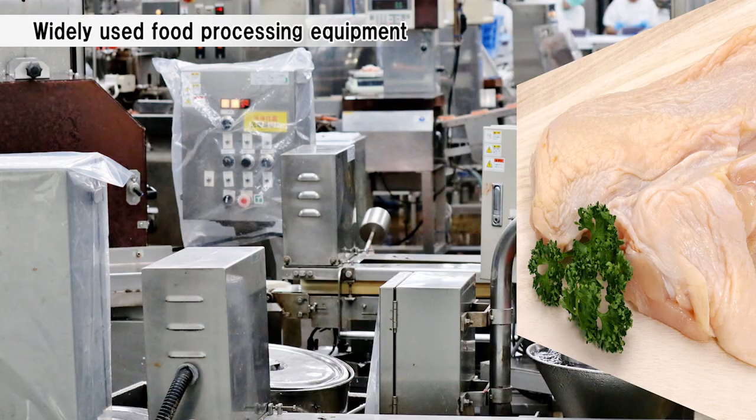At first, let us explain about the food processing equipment market. Food processing equipment is widely used in food processing plants, school lunch centers, and catering companies. Various processing equipment is needed to slice, bake, and fry many ingredients like noodles, bread, meat, and vegetables.

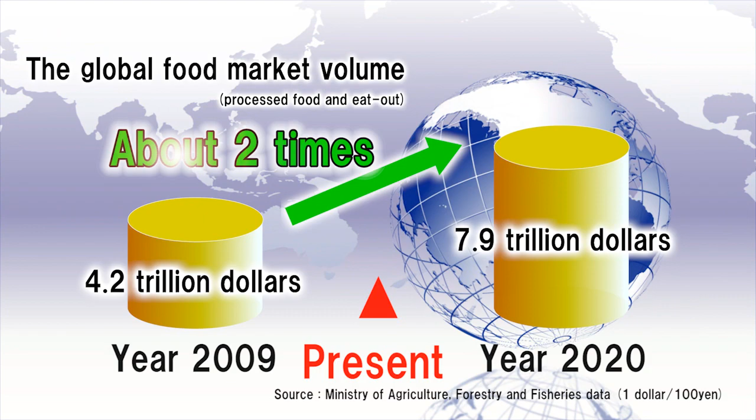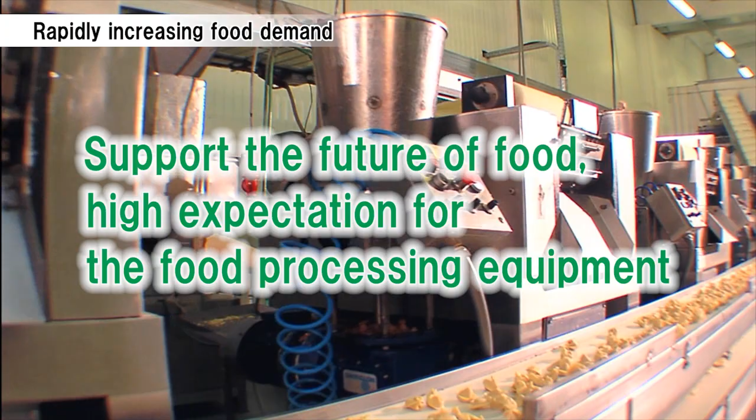The global food market volume is forecasted to grow rapidly with the increasing world population and diversified consumer needs. The growth is expected particularly in Asia and ASEAN regions. To support the increasing food demands in the future, food processing equipment is expected to contribute significantly in production efficiency with a safe, reliable, and tasty food supply.

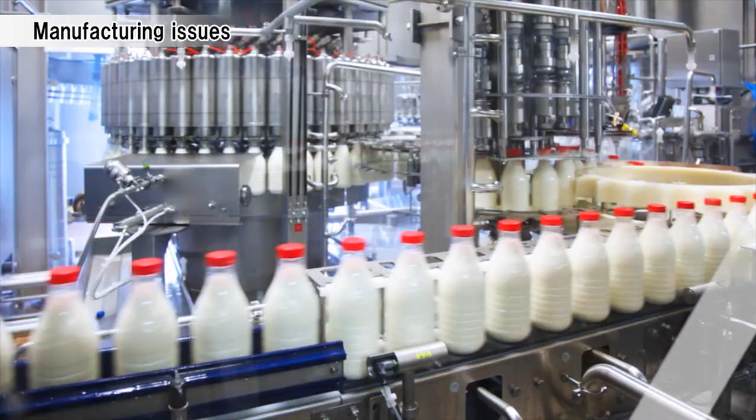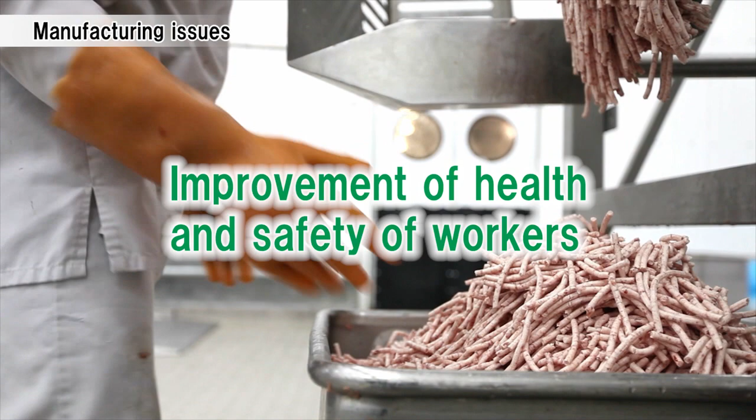Food processing equipment has been manufactured under strict international guidelines on hygiene and safety such as ISO and EHEDG. Moreover, in recent years, the requirements on health and safety of equipment operators and the reduction of food contamination risks are becoming even more rigorous.

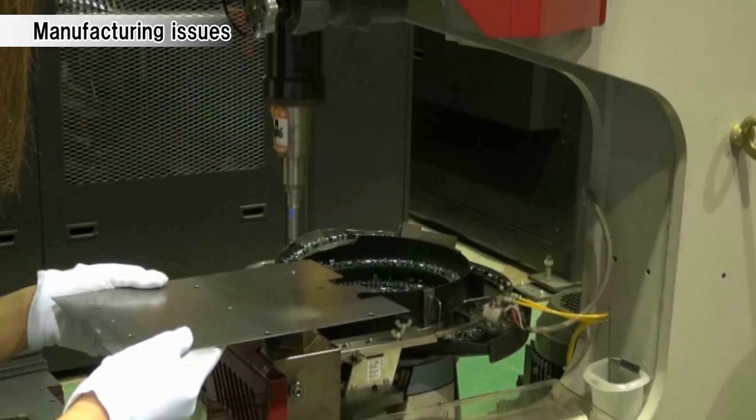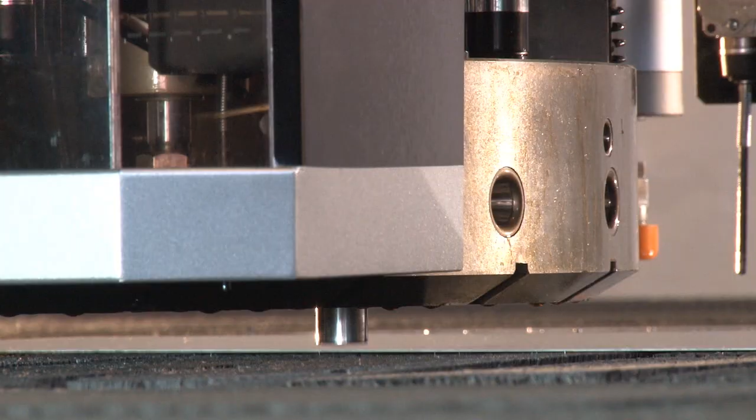For this reason, while complexity of manufacturing increases, higher quality with lower cost and shorter lead time have been strongly demanded. Manufacturers are under pressure to change to new manufacturing methods for better production efficiency without relying too much on skills.

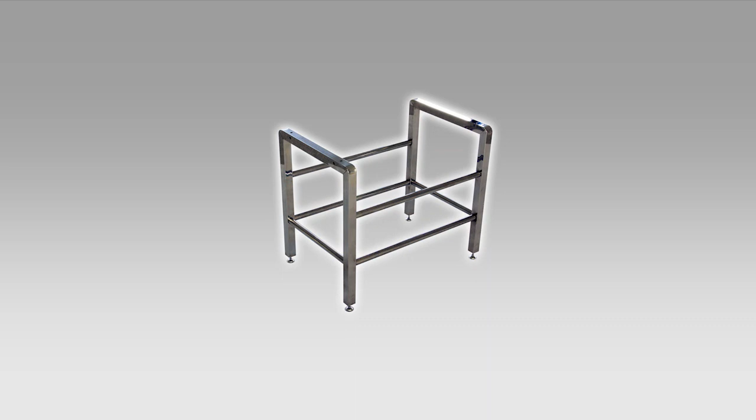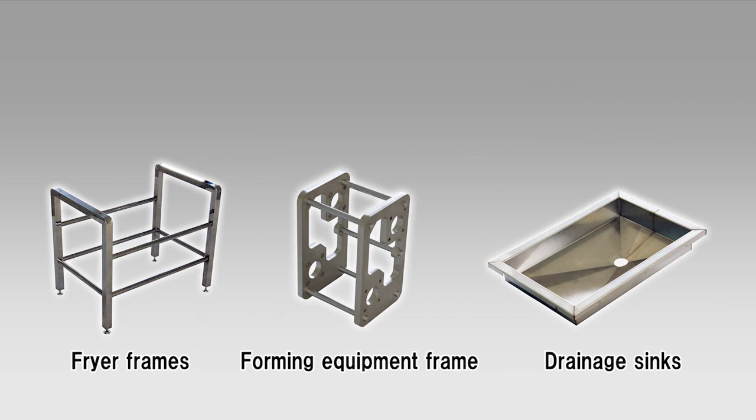Let us now introduce some specific examples of new manufacturing: fryer frame, forming equipment frame for flattening dumpling wrappers, and drainage sink for water and waste oil.

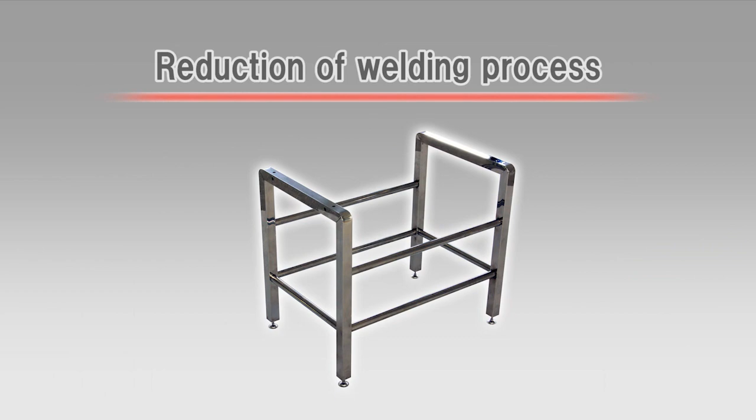First, let's use this fryer frame as an example to introduce new processing methods for reducing welding work. Traditionally, the square pipe used as fryer legs is cut into 3 pieces with circular saws and welded together.

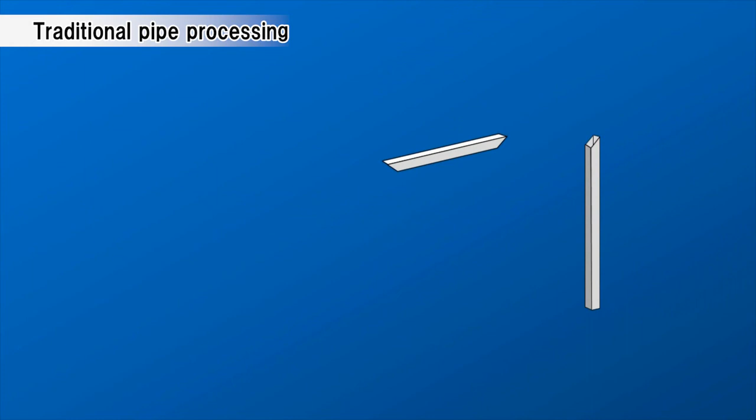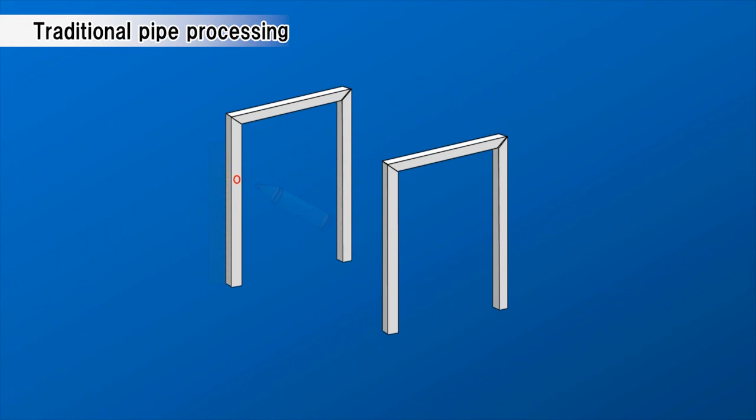When welding square pipes, welding places are scribe marked as illustrated in the paper drawing, and fixing of the right angle should be done by fixing support jigs. This method is time-consuming and requires experienced skills for precision finish, but it still is a very troublesome work.

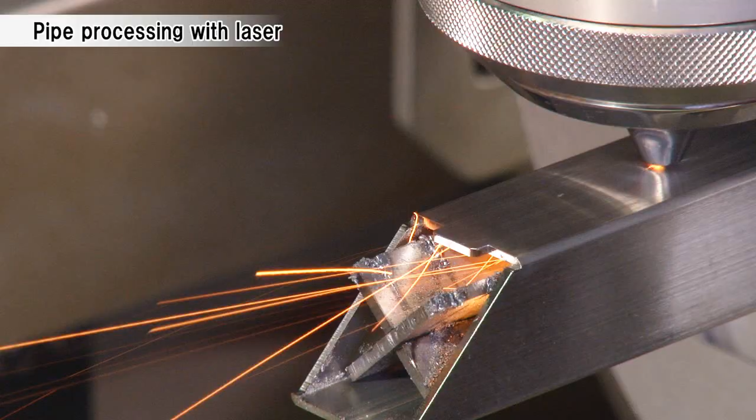Today, we would like to introduce the new processing method to reduce welding with laser cutting. The features of laser processing is to cut even complex shapes freely with accuracy.

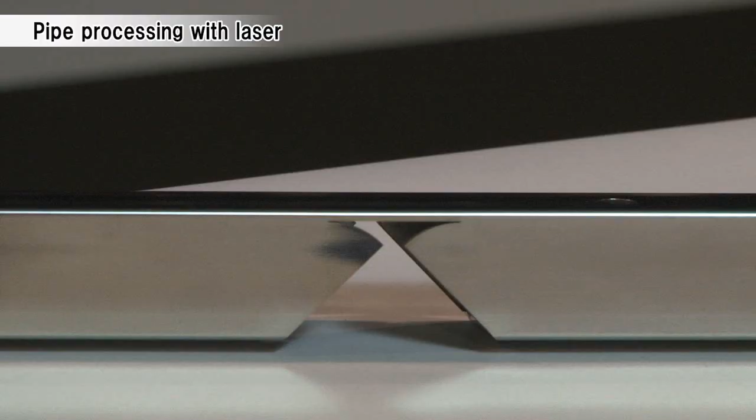Now, square pipes are cut into shapes like this. By using this area as the leveraging point, the piece can be bent manually with precision.

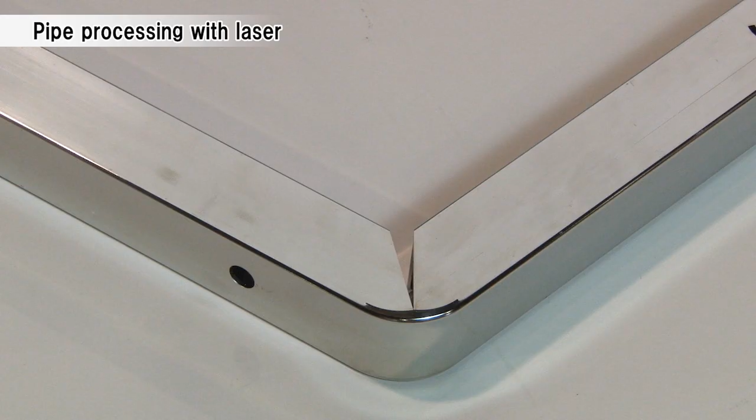With this method applied for the leg parts, all 3 pieces can be combined into one, thus eliminating several welding areas.

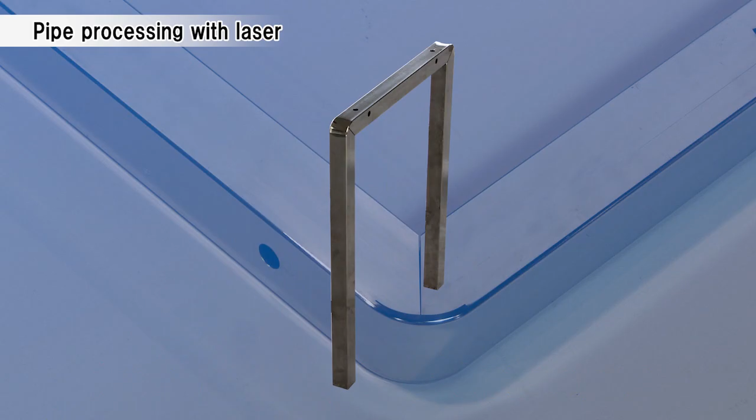Also, joint areas for square and round pipes are shaped this way. By inserting these round pipes, we can achieve the product's final design.

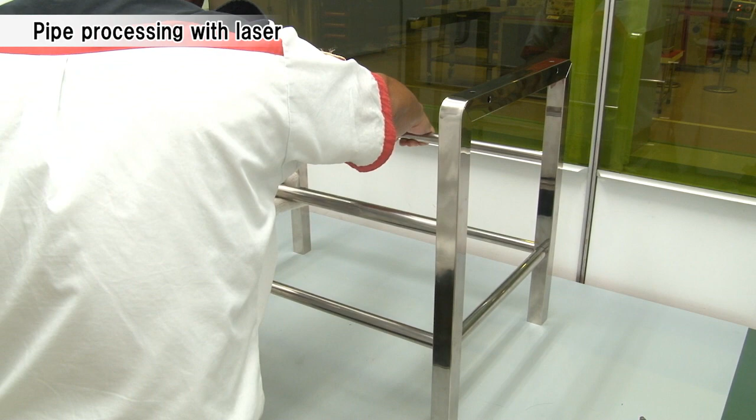This will reduce the time-consuming positioning task for tack welding, and the welding work starts right away. It is also easy to maintain component accuracy without experience and skills. Laser cutting changes pipe processing completely.

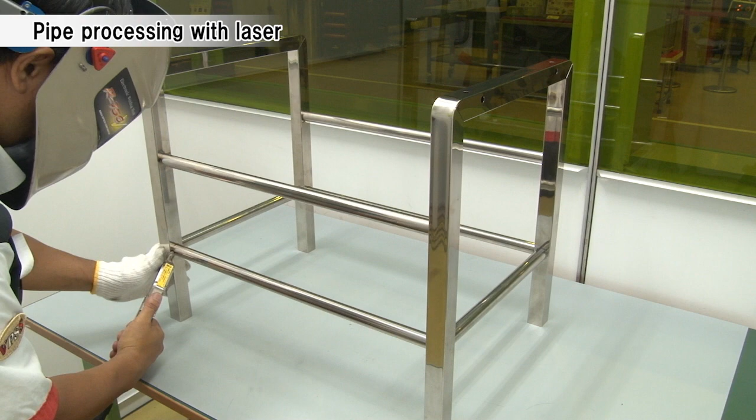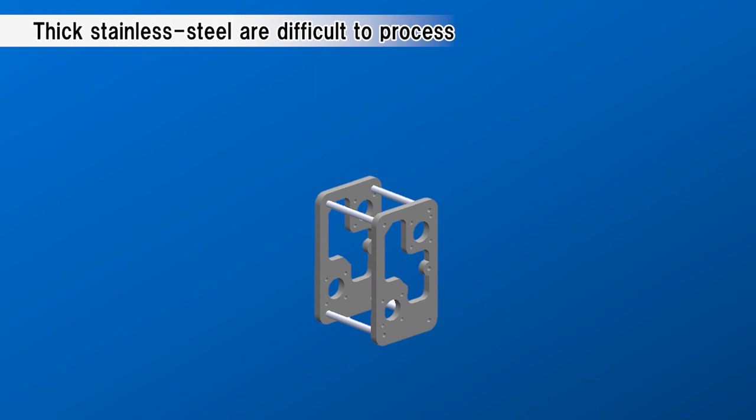Next, let us propose the reduction of machining process by using the forming equipment frame of thick stainless steel. Strong force is required when flattening dough. Therefore, thick stainless steel parts are used for a structural frame.

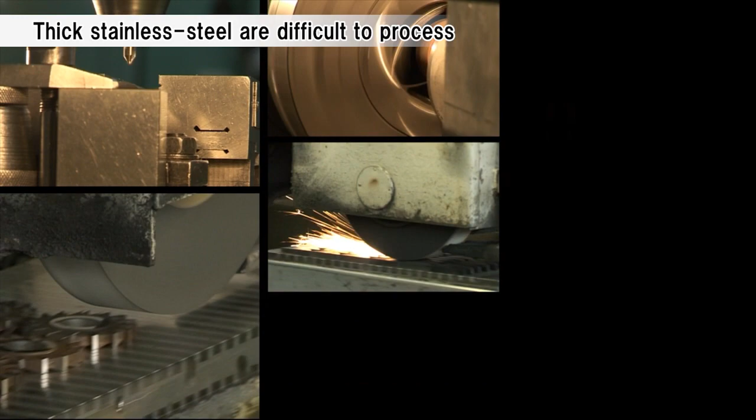Thick stainless steel sheets are not only difficult to process, but the beauty of a cut surface is also required. Besides, fabrication methods are very limited and machining is commonly used.

Today, we introduce Silky Cut as a new alternative to process thick stainless steel that achieves high-grade cutting edge with laser. The forming equipment frame is 20 mm of thick stainless steel.

As you see here, the piece has smooth, aesthetic, and shining edge. The lead time is surely shortened by the deletion of machining and the reduction of finishing process.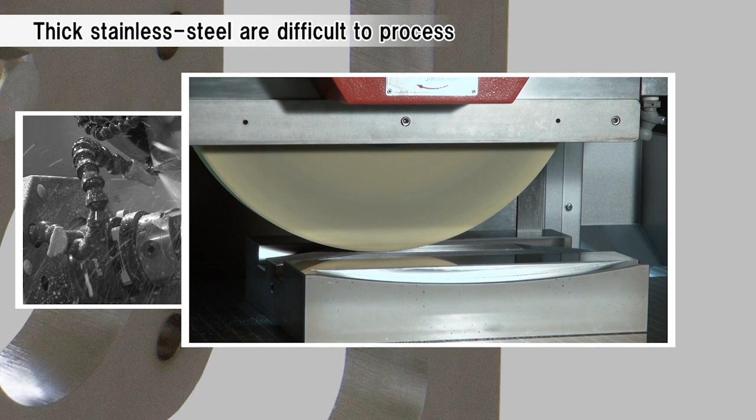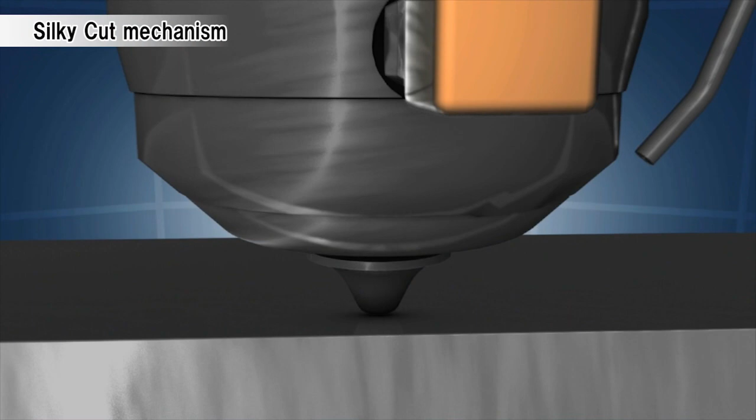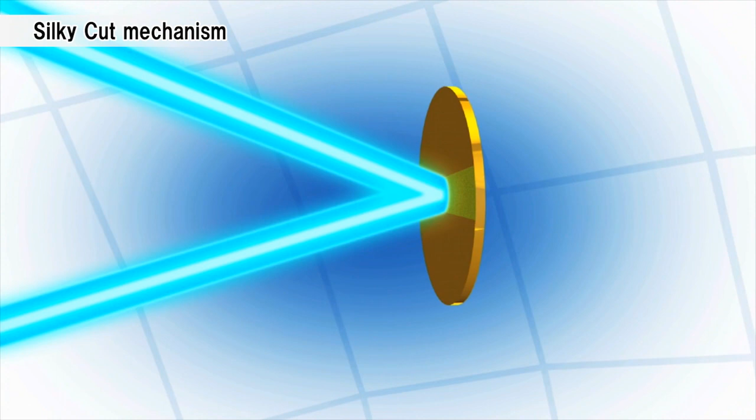Let us explain about Amada's laser technology for the Silky Cut. The laser beam generated from the oscillator will be adjusted automatically to the optimum beam diameter for Silky Cut by mirror polarization.

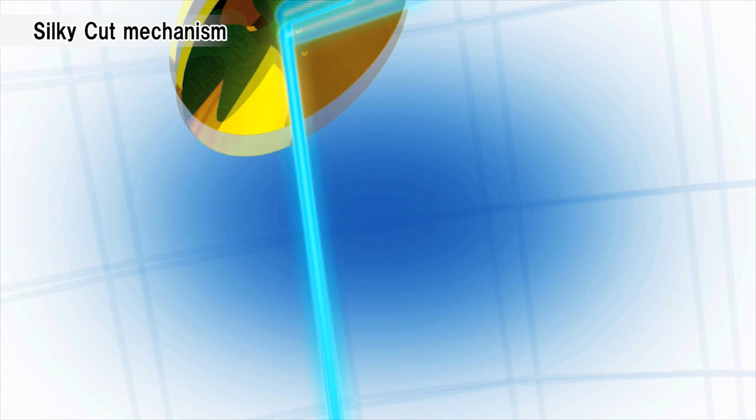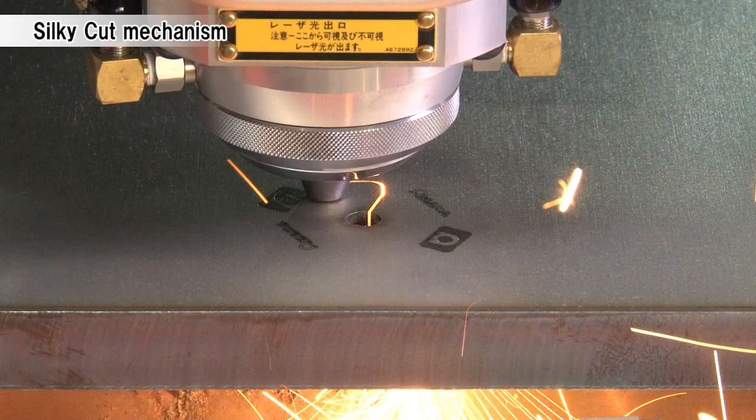The gas flow is also optimized by using a nozzle developed for this purpose to the assist gas outlet. Silky Cut, the high-grade cutting, is realized by combining these technologies.

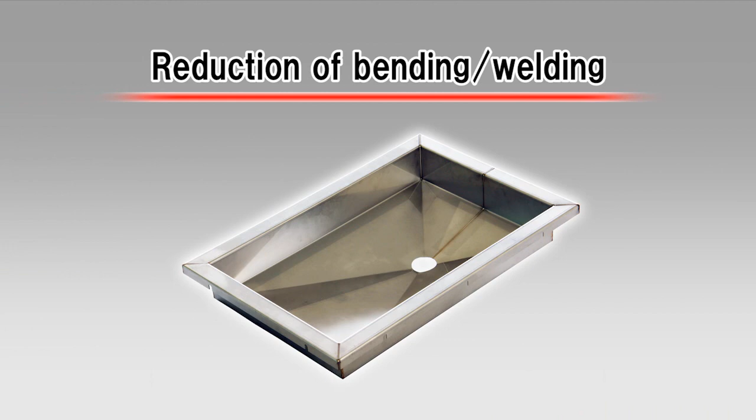Finally, we will propose reduction of bending and welding processes by taking a thin stainless steel drainage sink as an example. When you see products designed like this, how do you imagine the unfold shape?

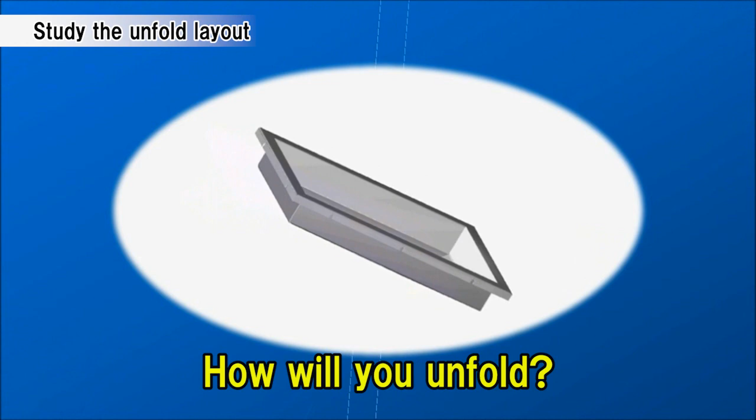There are many factors you need to consider, such as dividing position for bend feasibility, keeping bend accuracy, welding process, and impact of heat distortion. It is a very difficult and time-consuming task even for highly skilled workers.

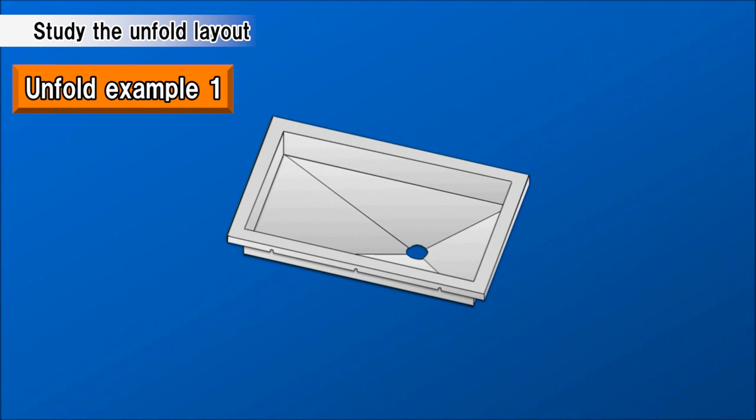Now, let's look at the unfold shape together. The first unfold example is aiming for reduction of the bending process. By dividing into 4 parts, the number of bends is reduced and bending accuracy is easily maintained.

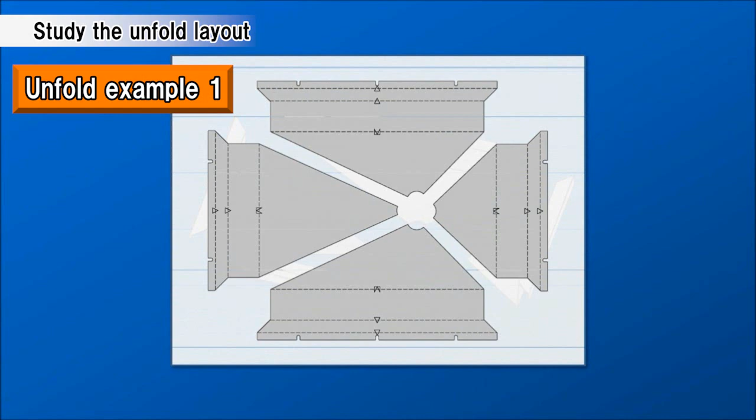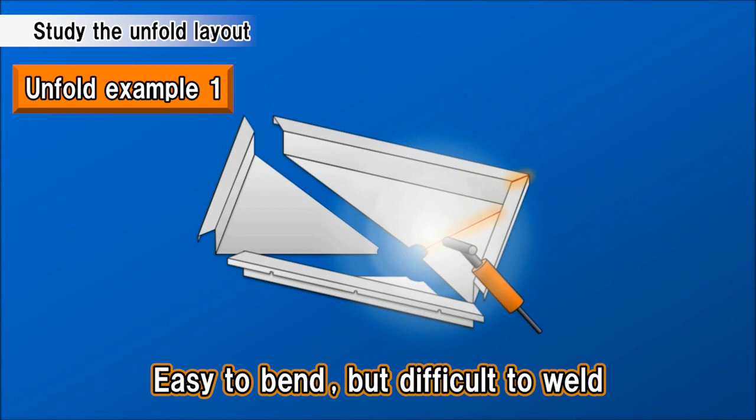On the other hand, it is difficult to accurately weld the parts together, and many welding lines possibly cause large heat distortion through a lengthy area. Experienced welding skill is required to maintain the product's accuracy.

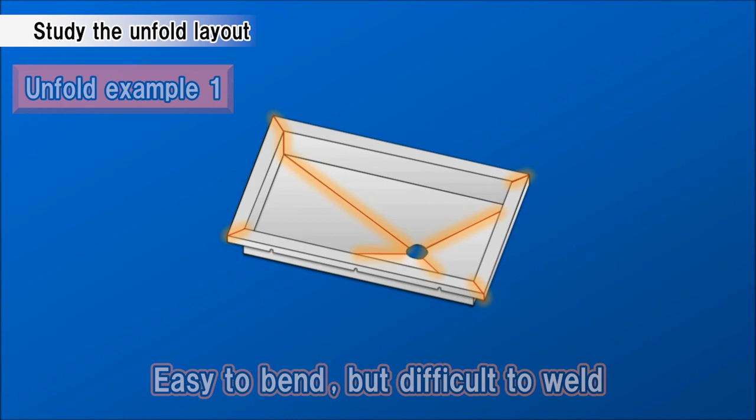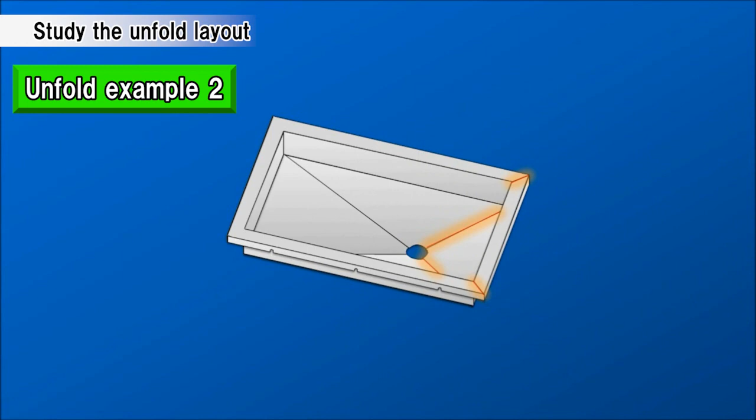Contrarily, the second unfold example aims for reduction of the welding process. As you can see, by limiting the number to only 2 parts, the number of welding lines is reduced, and so is the heat-affected area. The bending process, however, needs experienced skill to keep component accuracy, as bending work has to

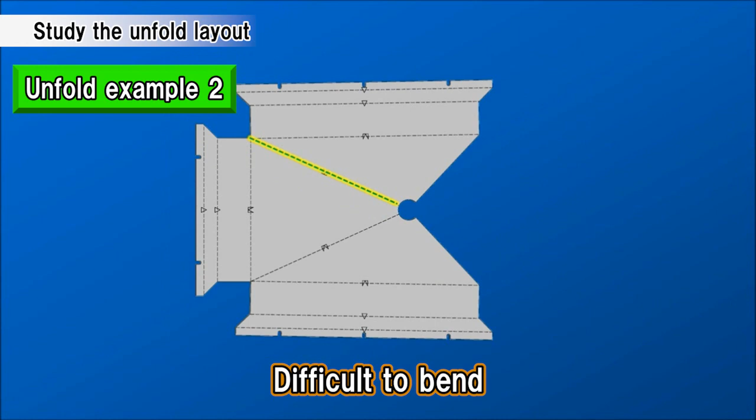be done by visual positioning of the scribe or punched mark, since there is no gauging face on the diagonal line.

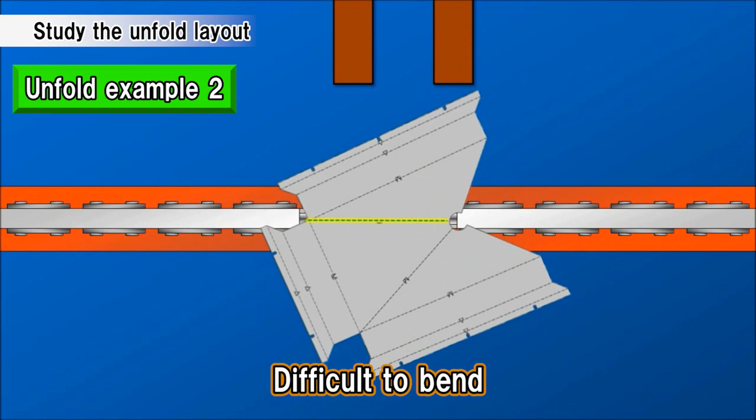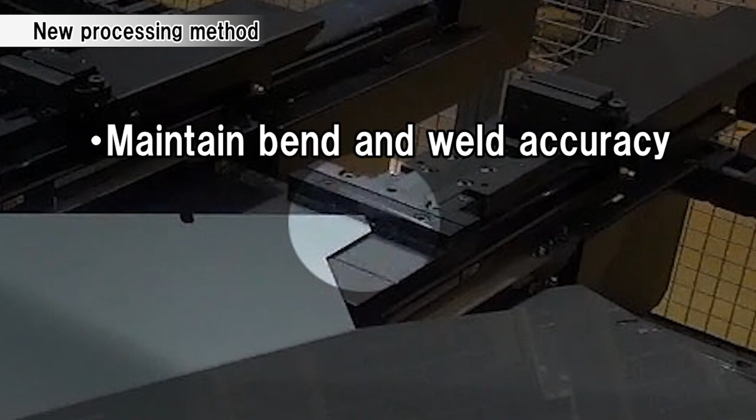To solve these issues, let us introduce a new bending method that reduces lead time while maintaining both bending and welding accuracy.

The unfold is a one-piece body with slits, without separating parts.

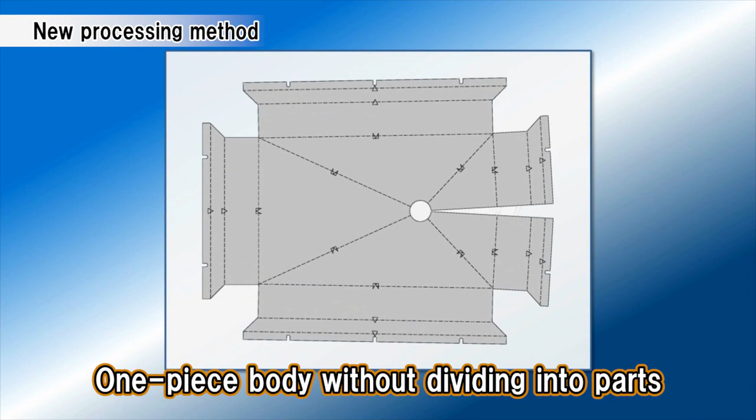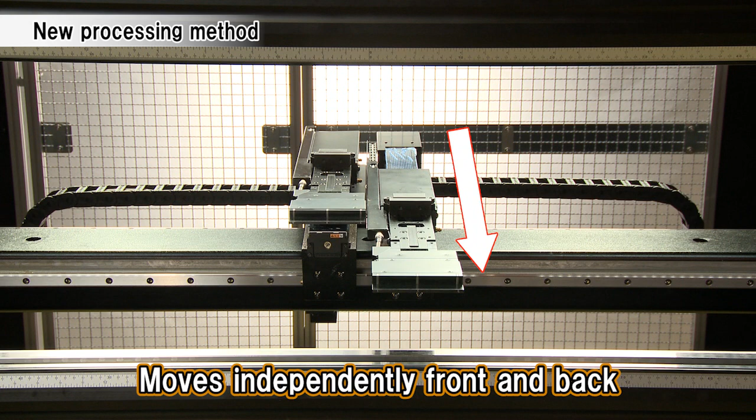In the past, it was nearly impossible to bend shapes like this, but with the new back gauge that can move front and back independently, and the new stopper method, we can reach quick and easy bend quality.

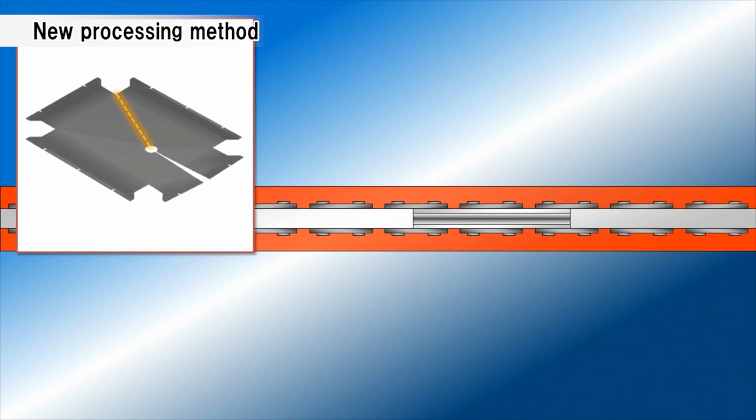First, we bend the obtuse angles on the bottom surface 4 times. By using the back gauge at the part's corner, accurate and steady diagonal bends can be achieved.

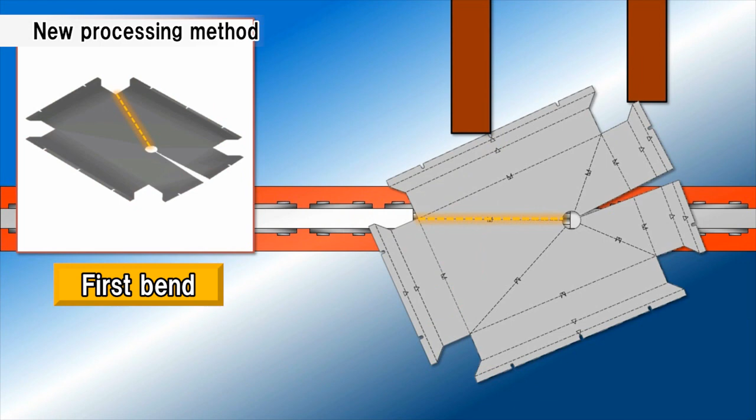We do the same for the second bend onward.

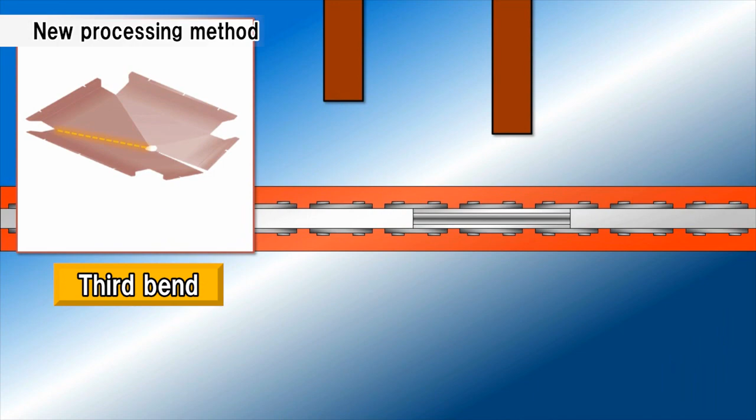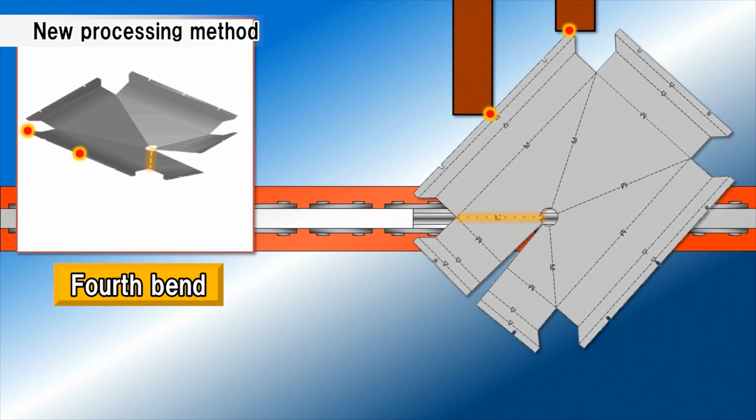Creating the point gauging program for the part's corner you have just seen is very simple.

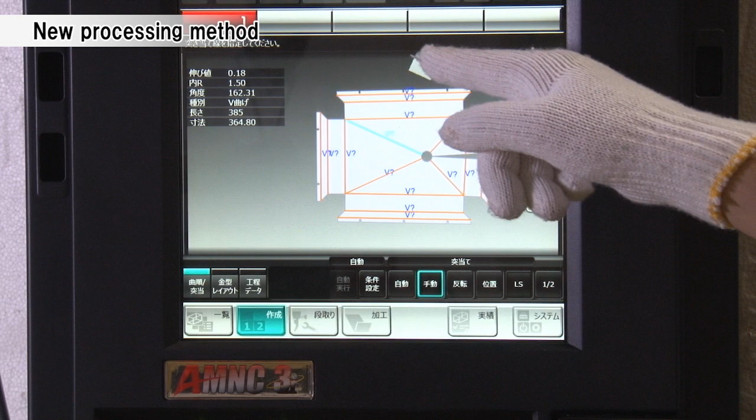When you finish bending the bottom surface, it will look like this, so the remaining bends can be done as with general box flanges.

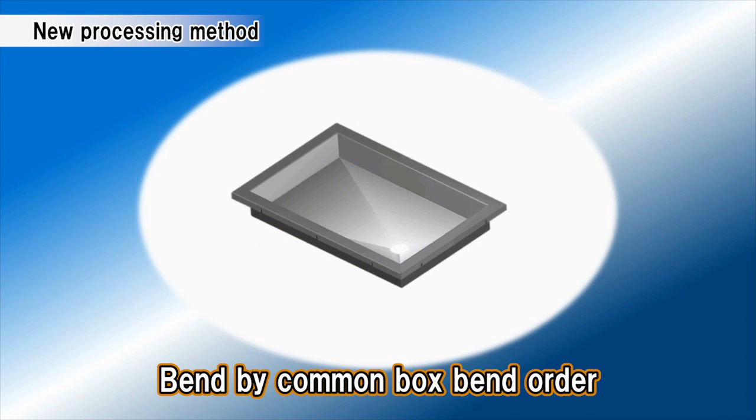By using this bend method, we have reduced the number of welds to a minimum without increasing the bend load.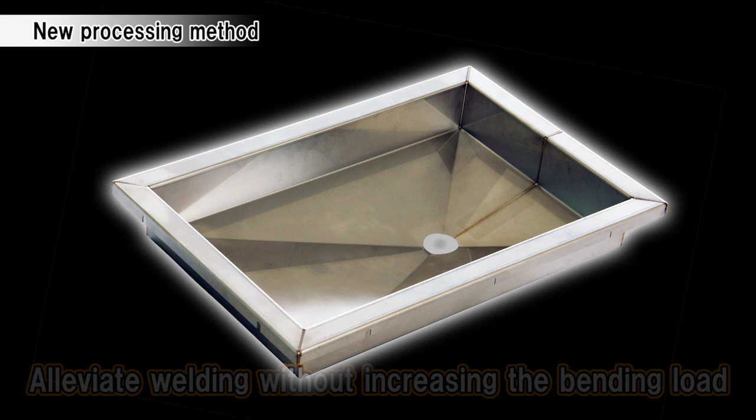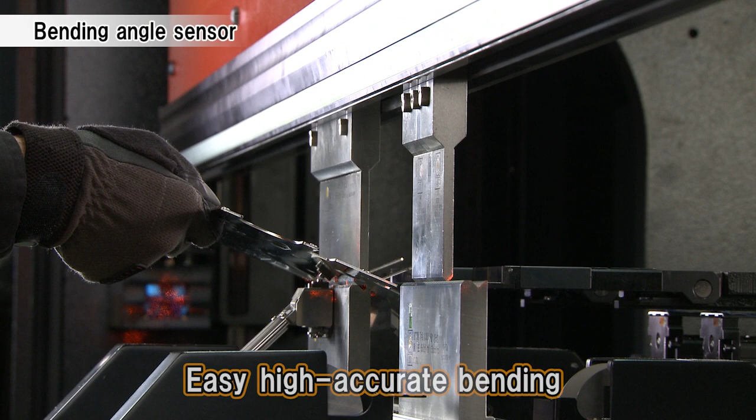Also, you have just seen obtuse bends that are difficult to achieve accuracy with in unfold, but by using angle sensors, obtuse angle bends can be precisely and easily achieved.

Furthermore, the high-grade fiber laser welding machine reduces finishing work after welding.

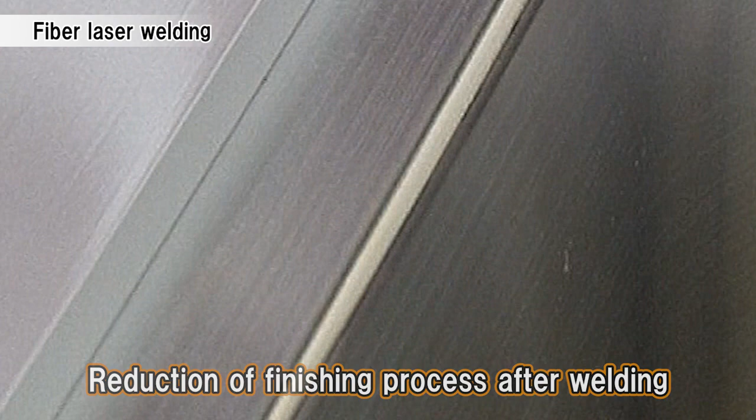Here, we would like to introduce our latest solutions in blanking, bending, and welding that incorporate the processing technologies we have just introduced to you.

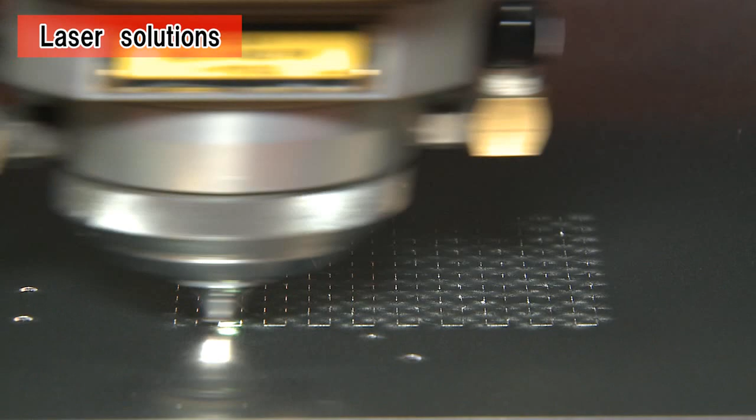This is FOL-AJ, the fiber laser machine, offering high speed and energy saving on thin sheet processing.

And this is LC-F1NT, the 3-axis linear drive laser machine for high-grade processing from thin to thick sheets. This is

FO MII RI, an all-round laser machine for pipes, structure steel, and sheet metal.

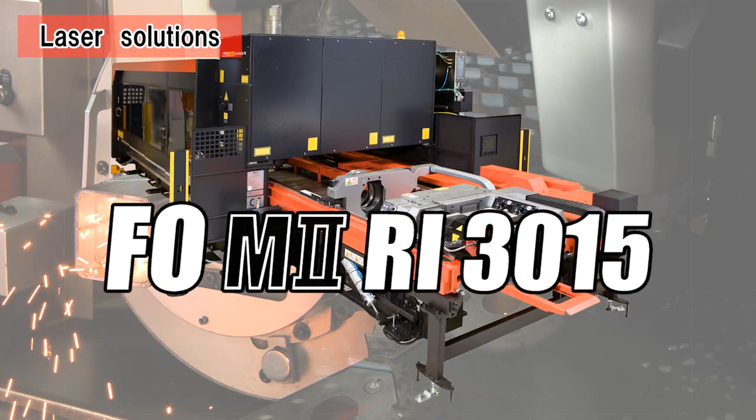The next generation hybrid drive bending machine, HG, for high productivity even in complex shape bends and R-bends.

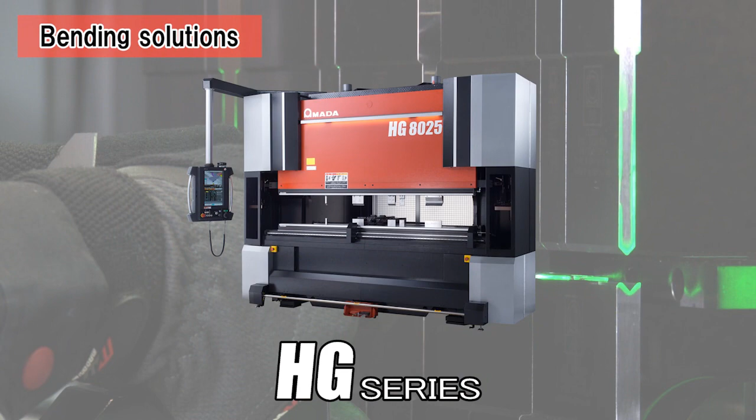The fiber laser welding machine, FLW, is for high-grade processing. It changes the boundaries of welding processes.

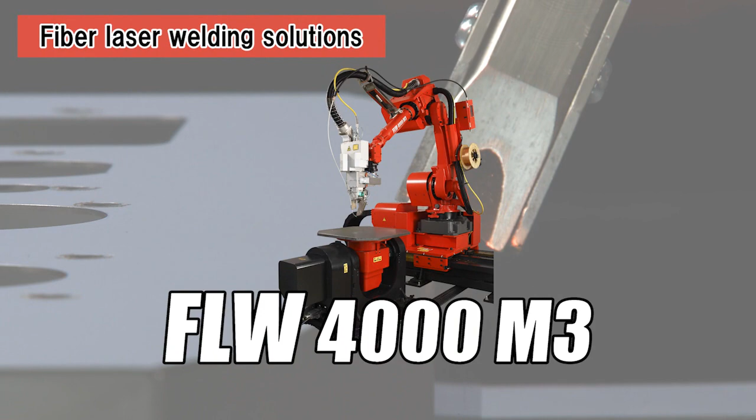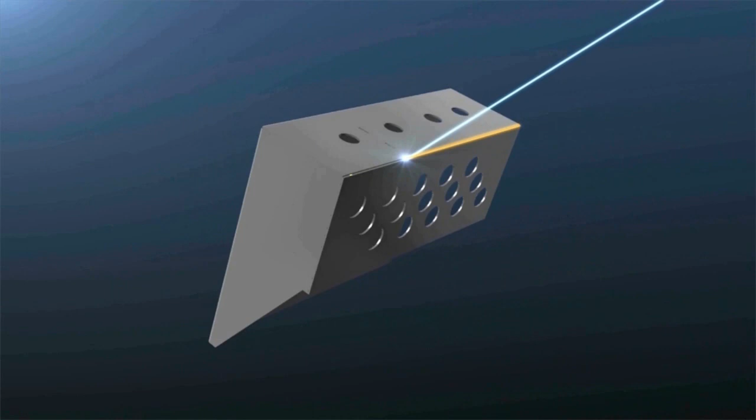We have introduced our leading-edge processing technologies and solutions that will create new manufacturing for you. Amada has been striving to create systems that reduce the lead time of high-value-added products without depending on skills in whole process stages.

Amada's new manufacturing proposals will drastically change today's sheet metal processing. We will continue to work with customers in solving manufacturing issues.